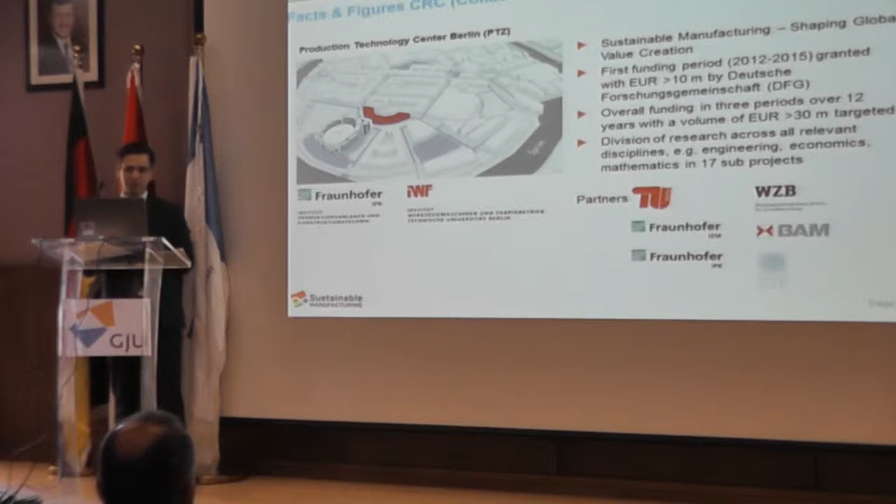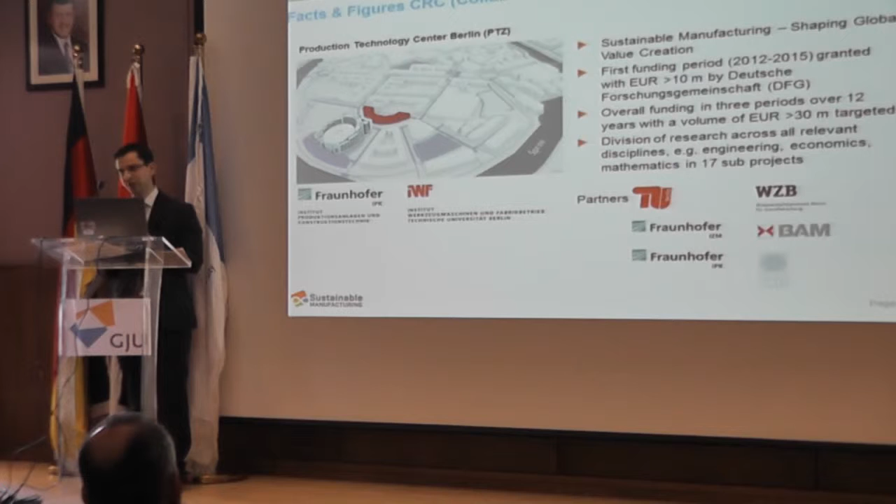In very short, our biggest project in our department is the CRC 1026, called Sustainable Manufacturing, Shaping Global Value Creation. The first funding was in 2012, and until 2015 we will receive more than 10 million euros. Hopefully, if we get the full 12 years for the CRC, it will be even more than 30 million euros for this project on sustainable manufacturing.

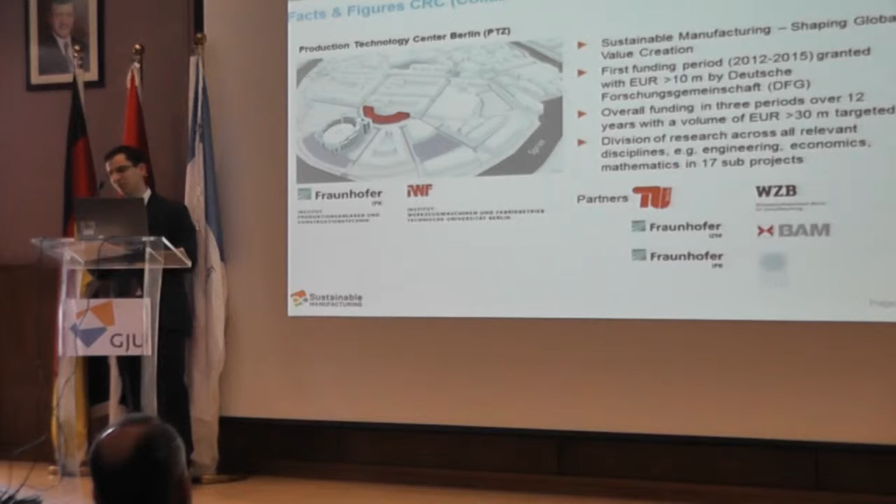The division of research is across all, at least for us, relevant disciplines.

In very short words, because it might be interesting for some of you, what we want to do is bridge the gap between, on one side, saturated markets, and on the other side, hungry markets in the world.

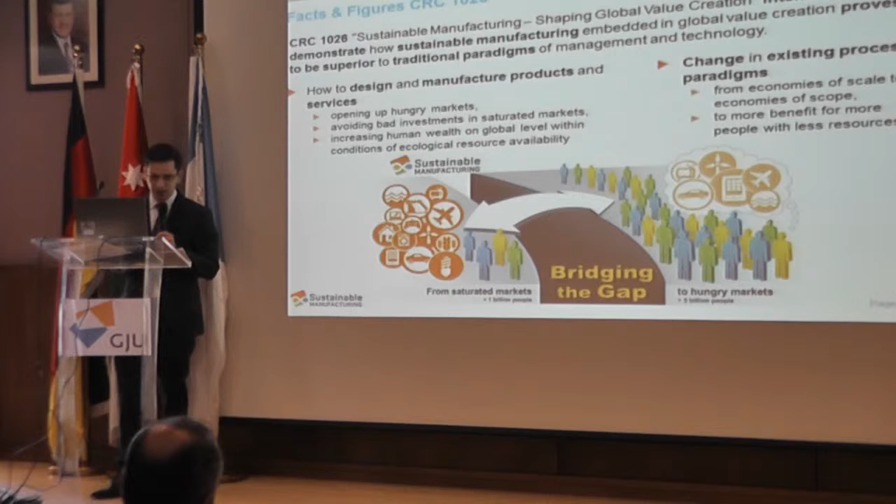Right now, we could say we use so much energy that we would need 1.5 worlds to be sustainable. In 2050, it's approximated that it will be 2.5 worlds that we need. So if we want to enable the hungry markets to have the same possibilities as in the saturated markets, we need to design and manufacture products and services in a sustainable way, and we also need to change existing process paradigms that we have.

I want to say a few words about the GCSM that we have in September. In the organizing team are Dr. Abdelal and me, and the deadline for full paper submission is the 12th of May, whoever is interested. It's a conference for academics, researchers, and practitioners in the field of sustainable manufacturing. We offer keynote speeches, panel discussions, parallel sessions, and a global student competition on sustainable sanitation systems.

Now about maintenance. The importance of maintenance, we already talked about that, especially about availability. What I can add is that about 255 billion euros has been spent in Germany for maintenance in 2009.

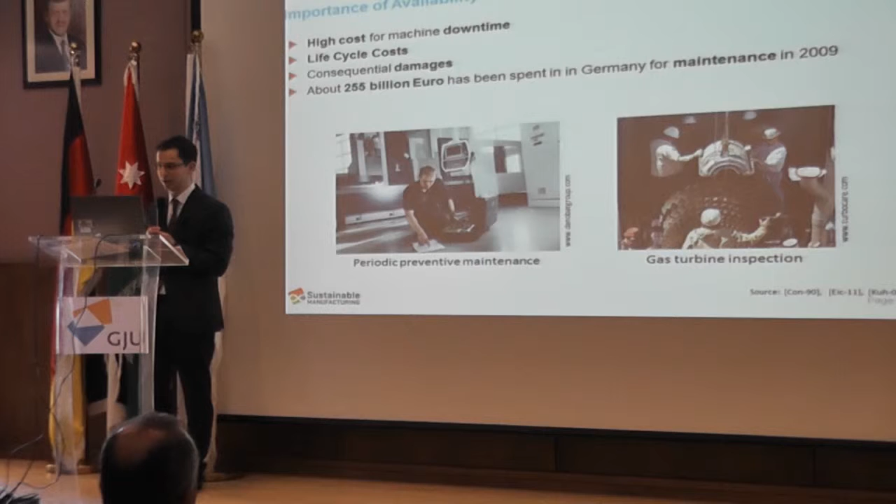Another slide that we have not seen yet is that the overall availability right now is 70% in production systems, at least in 2006, and it was considered as usual, while 80% can be evaluated as excellent. So what does 70% mean?

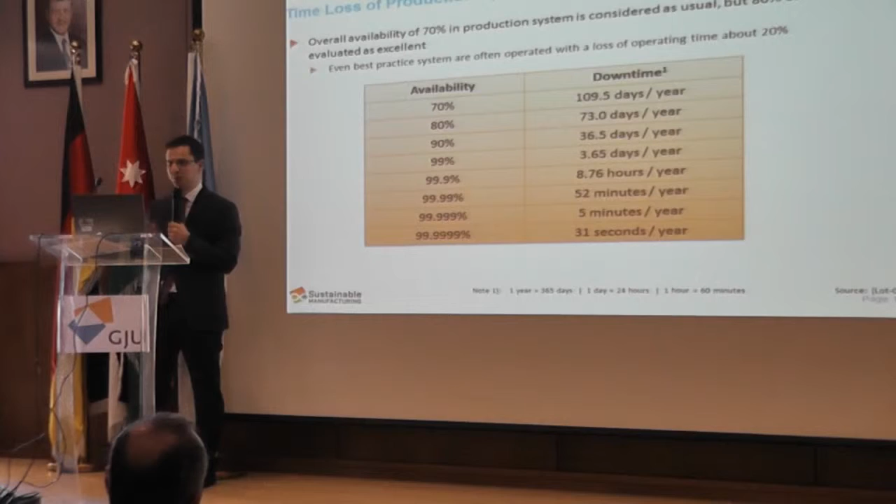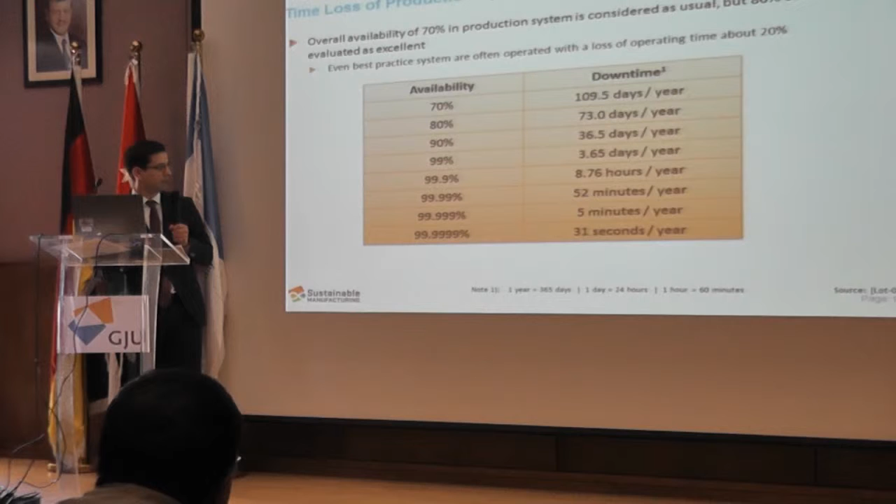70% availability means, on the other side, that we have 110 days where the machines are not running. Even if we reach 99%, which sounds pretty high, it would still be almost 4 days where our machines are not running and we cannot produce. So we can see it's a good aim to try to get as low as possible in this table.

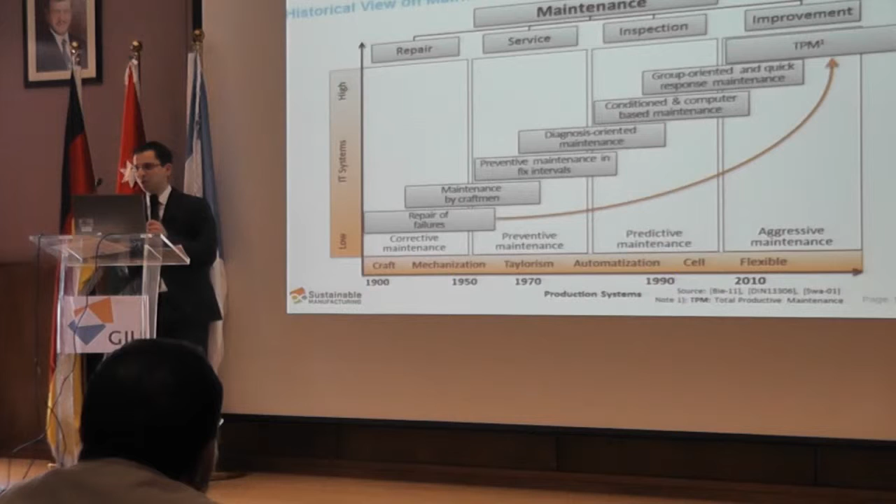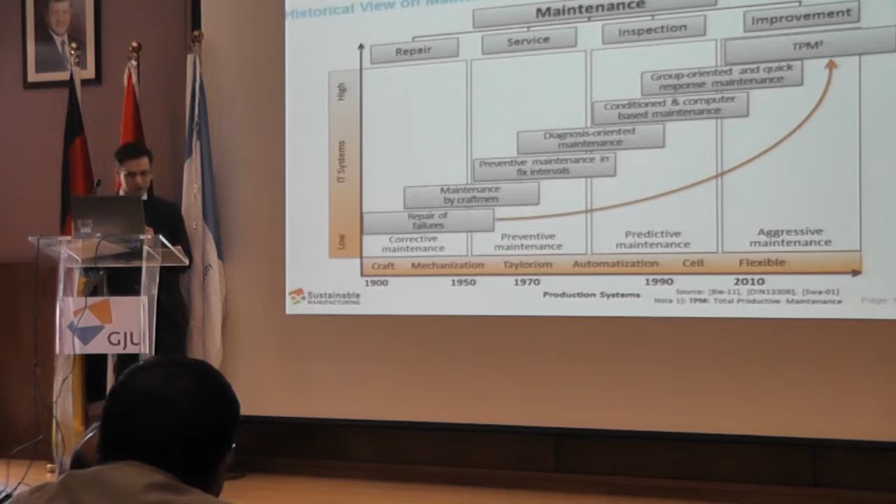A very short historical view on maintenance approaches. We already got two slides about that. I can add that it went from repair to service inspection, and today with TPM improvement. We went from corrective maintenance to preventive maintenance, predictive maintenance, and now so-called aggressive maintenance, which means that we want to improve ourselves, in the context of, for example, TPM.

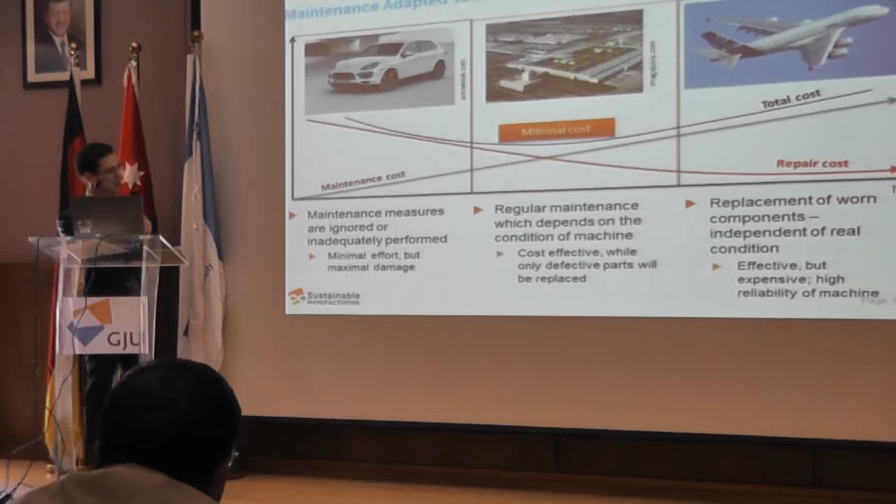This is another slide we also didn't have yet. On the left side, you can see an excellent Porsche. Maybe it's the wrong picture—an Opel Corsa would be a little bit better because we would maintain it less. So we see that the repair cost would be very high because we normally drive a car until there's a breakdown.

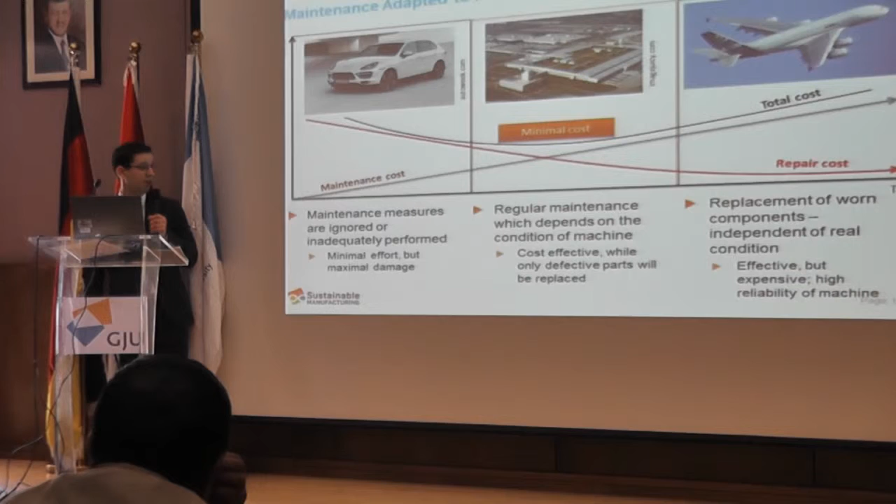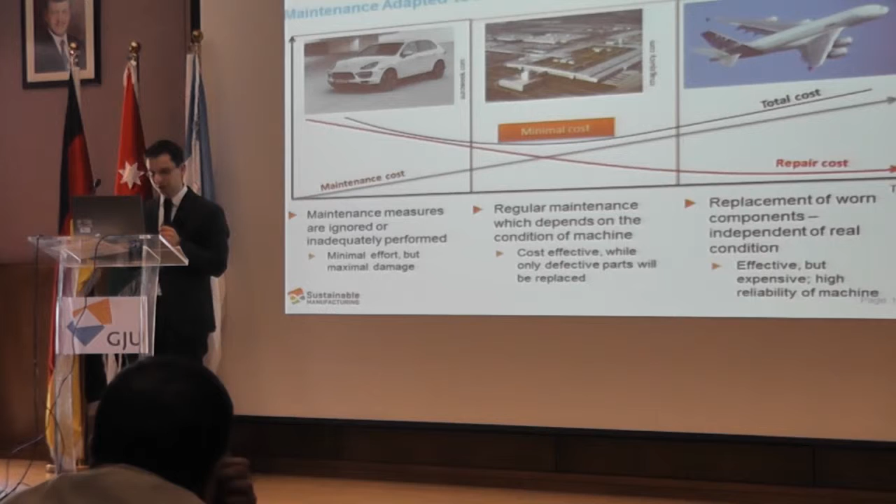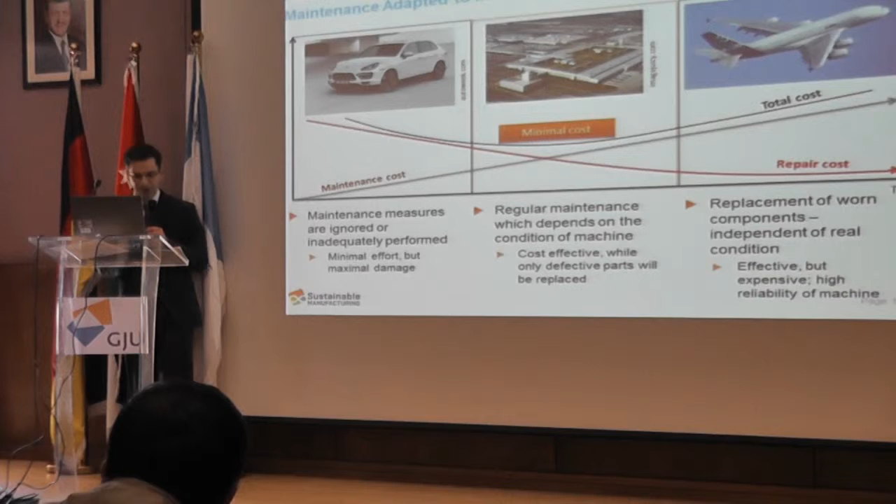So we would have high repair costs, and on the other side, very low maintenance costs because we don't maintain it. On the other side, we have the airplane, the Airbus 380, where we would have very high maintenance costs but pretty low repair costs, because we don't want to wait until there is a breakdown in an airplane—that would be a very bad strategy. In the middle, we see a factory where we have the minimal costs in this slide. We can see, on one side, we still have some maintenance costs, but also repair costs. It would be cost effective, while only defective parts will be replaced.

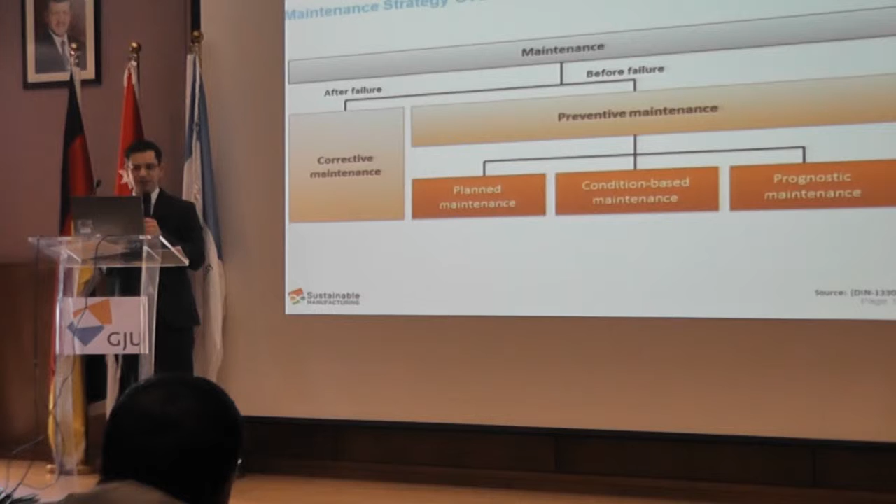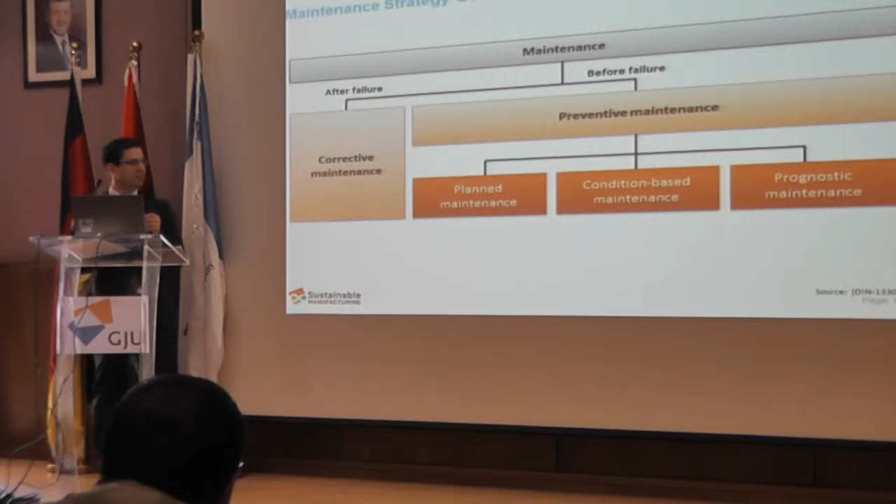This is also a slide we have seen already, more or less. So we have on the one side after failure, on the other side before failure. It's of course wise to be on the before failure side, the preventive maintenance, which can be divided into planned maintenance, condition-based maintenance, and prognostic maintenance.

One maintenance strategy is driving until breaking, as I already talked about with the Opel Corsa. This is maybe not the best strategy that we can use in factories. So what we want is preventive maintenance, before the failure, to prevent a breakdown.

What we already talked about is also condition monitoring of machines, or condition-based maintenance. The aim is to identify when the system will break, and it offers targeted monitoring and information collection. So we have on the one side continuous monitoring, the monitoring of the machine during all the time, and on the other side the scheduled monitoring.

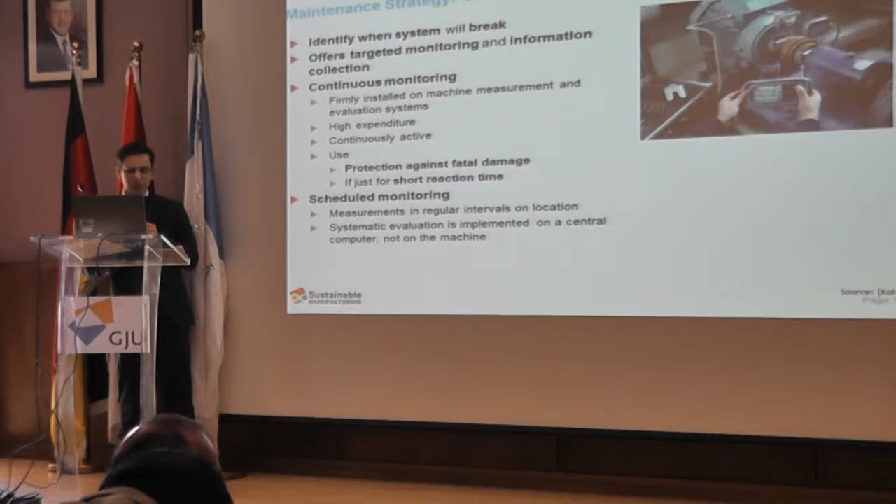There are pros and cons for both strategies. With continuous monitoring, it's a protection against fatal damage, and we can use it if we have a very short reaction time. Then continuous monitoring would be the better idea. On the other side, we have scheduled monitoring, where we would check in regular intervals.

The motivation for condition monitoring, this is also something we heard. We would have no unforeseen failures, at least hopefully no unforeseen failures. And we would gain knowledge about relationships between process data to identify and predict failures. So what kind of physical parameters do we have for condition monitoring?

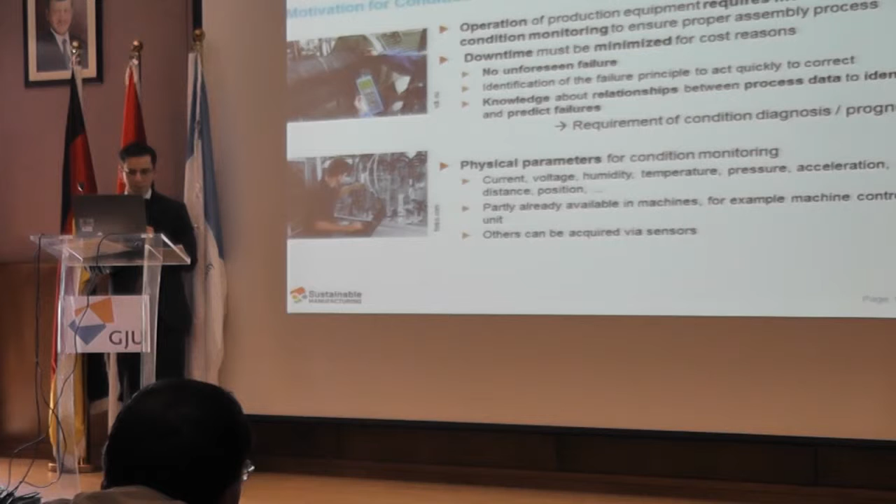We could have the voltage, humidity, temperature, pressure. It just depends on the machine. Right now in some machines we already have parameters for that. We can measure it, but we can still add some more control units to that.

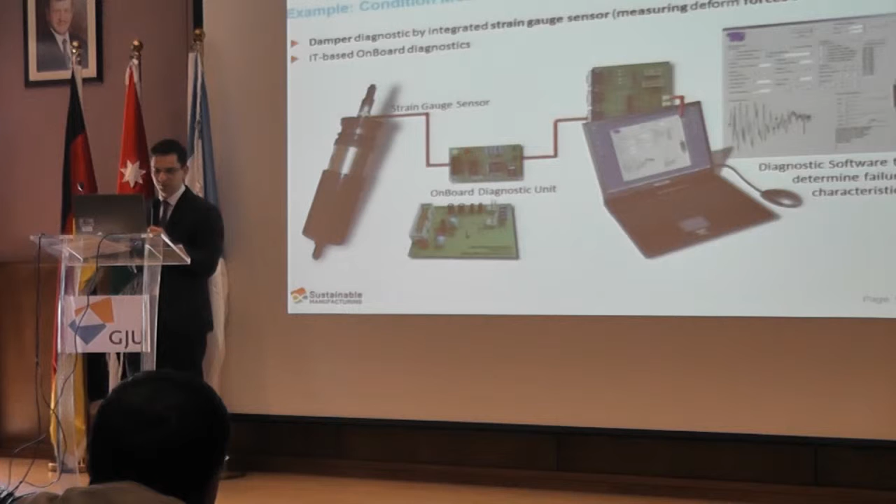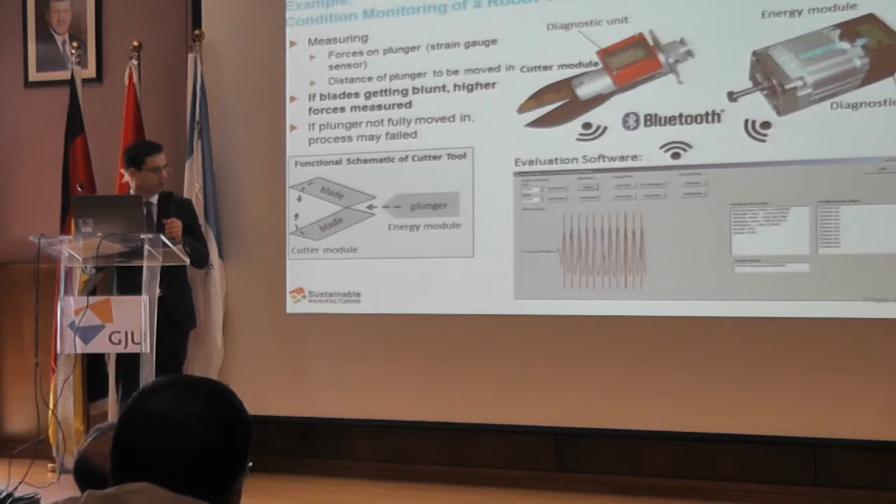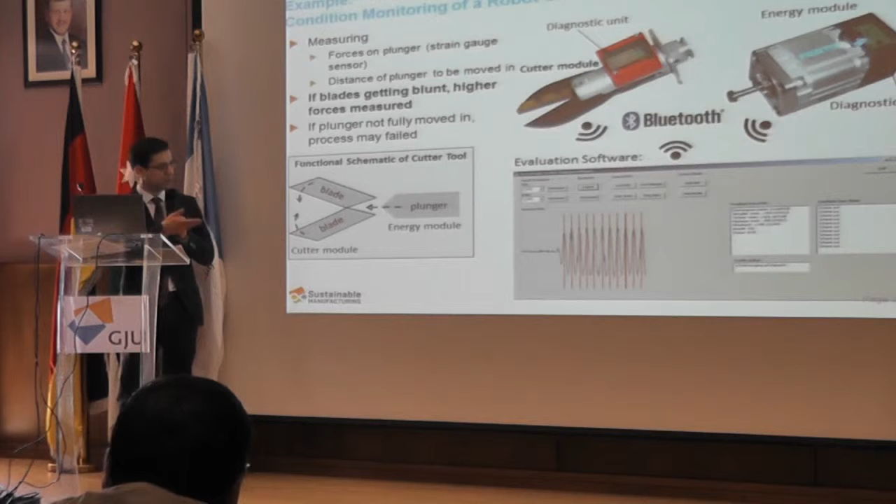On this slide we have another example. It's a cutter module here where we have the blades. Here it's nice to see: the black one would be the regular forces that are needed, and right now we would be on the red ones. So we would know that something might be wrong with the blades, for example they got blunt, and we can just see that by the forces that are needed for cutting.

Here on the picture you can see the diagnostic unit. This is our project at our university. It's KAP, Knowledge Awareness Prediction. It's about using the knowledge of the past, awareness of the present, and the prediction of the future. By that, we want to gain more transparency within this project and optimize production by efficiently using data generated by machines and sensors. As you can see, we have also some industry partners for this project.

Right now I would like to show you a very short video from SAP because they just have the nicest video on this topic, and you can also watch it in whole on YouTube if you like. So I will skip some parts. As I said, it's about knowledge, awareness and prediction. They're a partner of us, and it's about introducing high performance data streaming processing for real-time decision support.

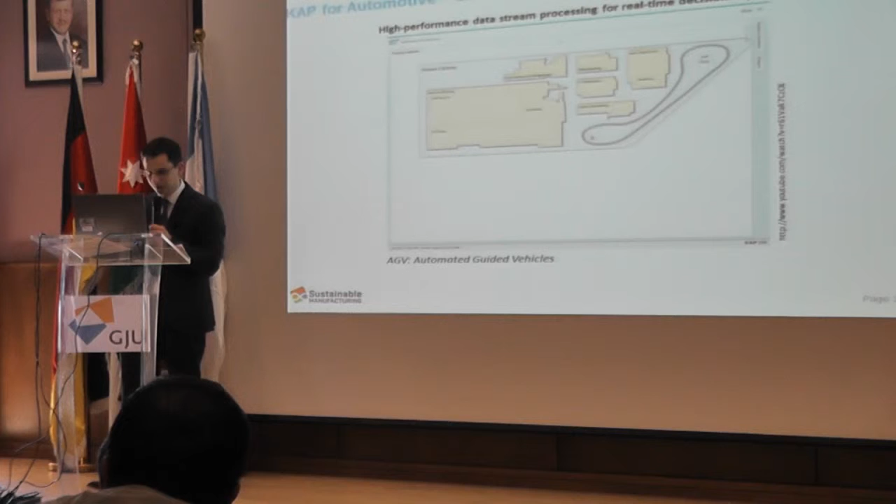The key challenges that we have within this project are to avoid unscheduled downtime and reduce scrap and consumables. Mainly what they are showing in this video is a production site of Nissan, where they have a production line with AGVs, automated guided vehicles. We can see the Nissan factory and the test track, very short and very small.

Here you can see the AGVs driving, the automated guided vehicles. The project is also about the batteries, right now how much energy they have. Here now, any second, yes, right now - there you can see the AGVs driving in the factory. And what they are also screening is the battery within these AGVs.

After it gets to a certain point, let's say 10 or 20% of the energy, they will know it in advance. So when they get close to the maintenance station, they can stop there, take out the battery, put in the new battery and recharge it. This is the one part of what they did here with SAP.